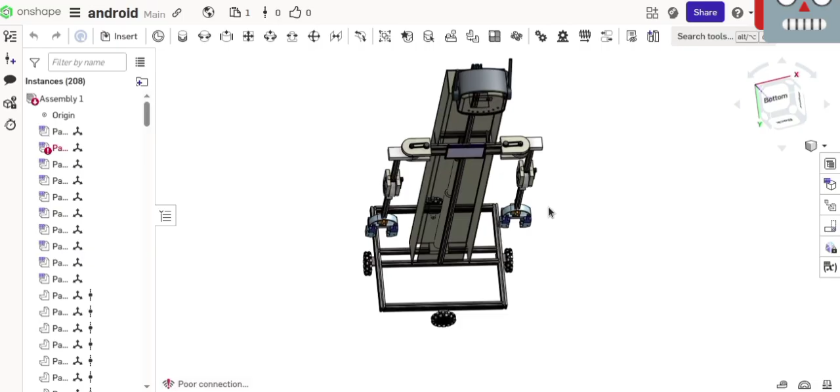Hi, in this video I will walk you through a robot that I have made for a startup-based company, for a robotics competition. The challenges explain their requirements, what they are actually looking for from us. They are looking for people who can make this kind of thing, even the chassis.

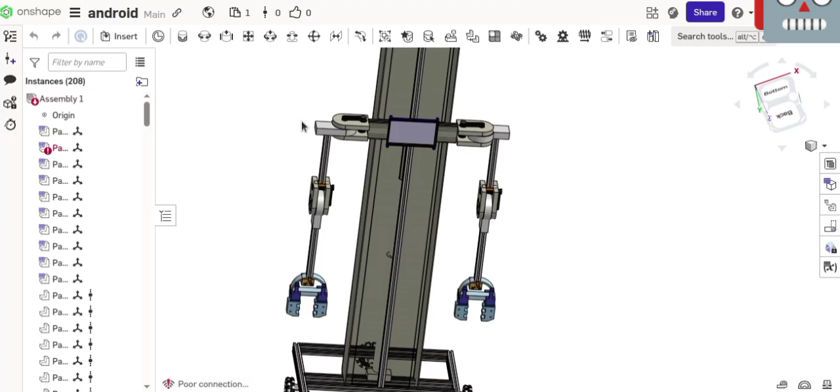This was my idea: a four-wheel and dual-arm based robot. In the center of this robot there is a vertical extrusion which gives support to the arm, to the shoulder. The shoulders can be increased or decreased using the linear actuator present on the back side of that aluminum extrusion. We will be seeing that.

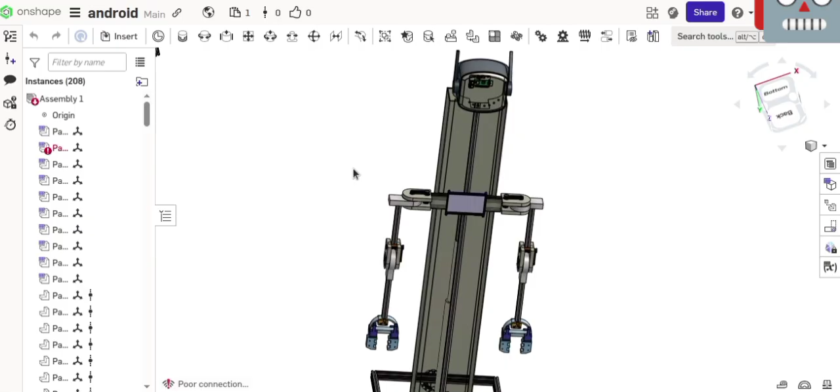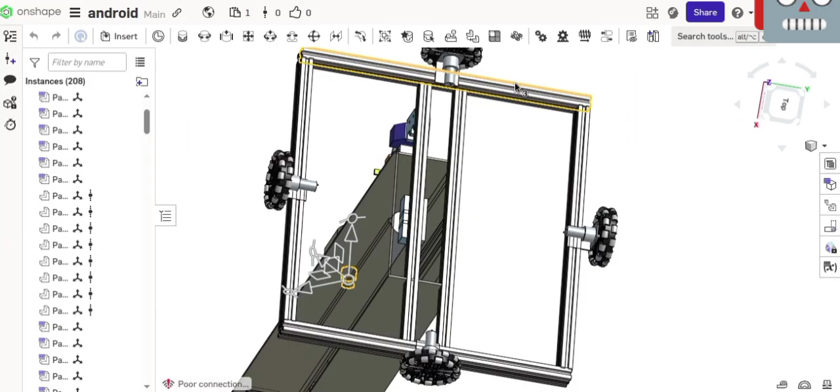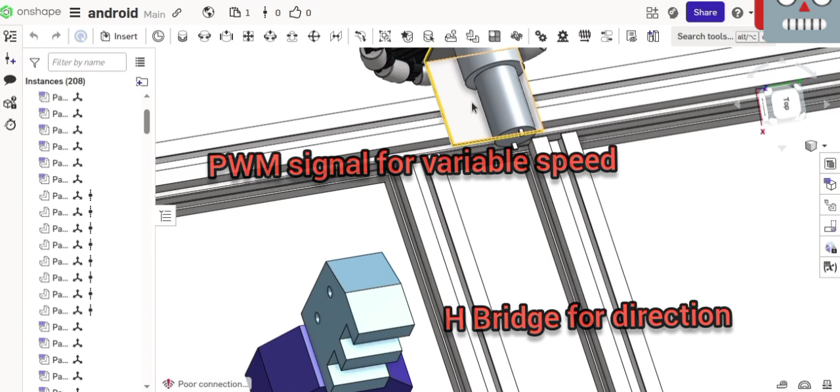On the back side of this robot, I am using four different motors here and four omnidirectional wheels. As a result, it is possible to get 360-degree rotation, and these are based on aluminum extrusions. Since I'm using 12 volt geared motors, I will be using power MOSFETs and H-bridges to give them variable speed as well as front and back logic.

Now back to the part studio. Here I will be explaining, back to our topic. So this is the aluminum extrusion. Let's double click it, then we can see.

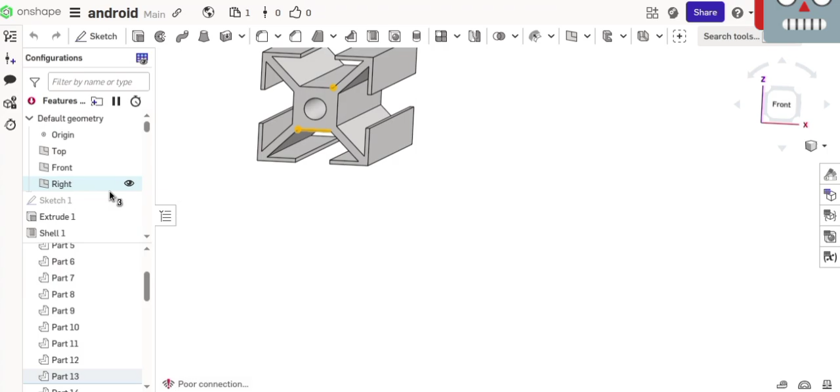So first I make a sketch, then removed some parts and made some adjustments, and later I created some parts here that look similar to aluminum extrusion. Those are the dimensions which I have taken from the internet for the extrusion.

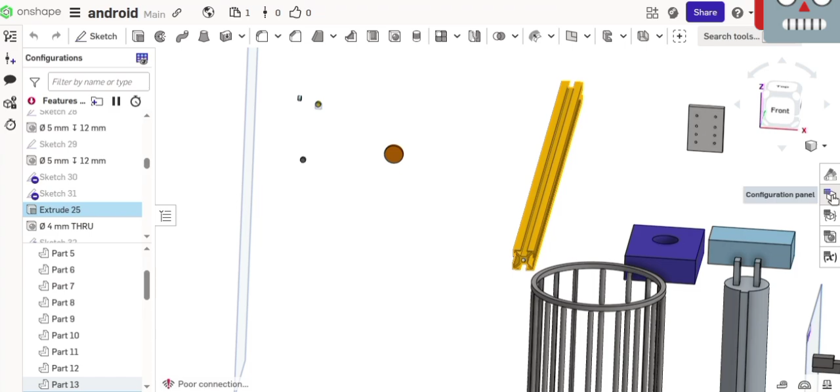Because we want so many different shapes of this aluminum extrusion, you can see I have given so many dimensions here, from 50 to 1500, and similarly for other parts. Let me show you what it is.

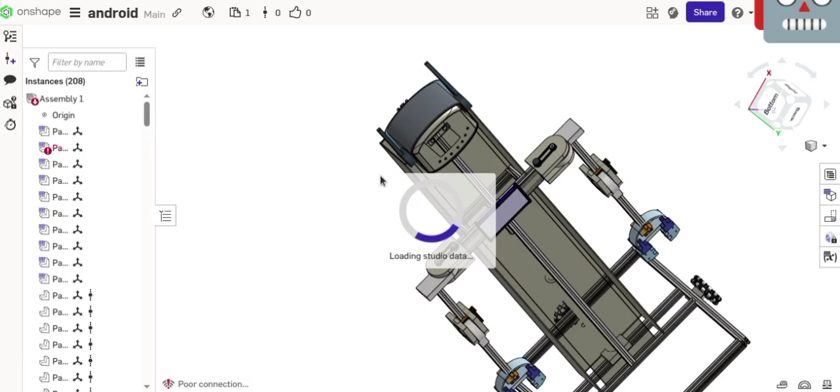In the assembly section, you can see I have used that aluminum extrusion here. This one is the biggest one, which is 1500, and then other parts as well. You can see some small parts of the aluminum extrusions are also used, for example over here.

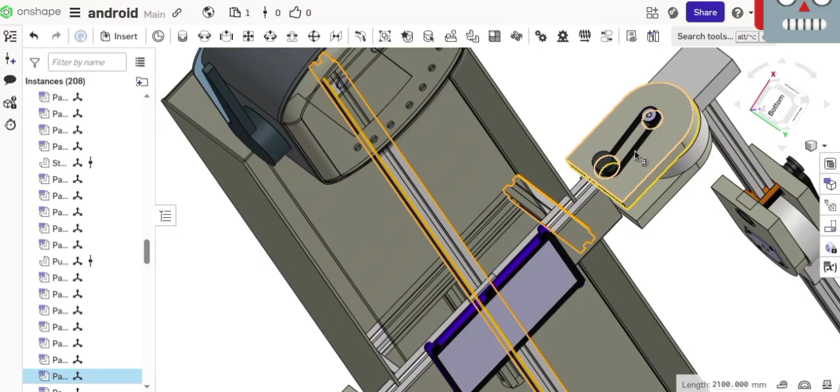And these are some pulley and belt mechanism, although it is not perfectly aligned now. Let me see if I have something here. So basically the idea is inside.

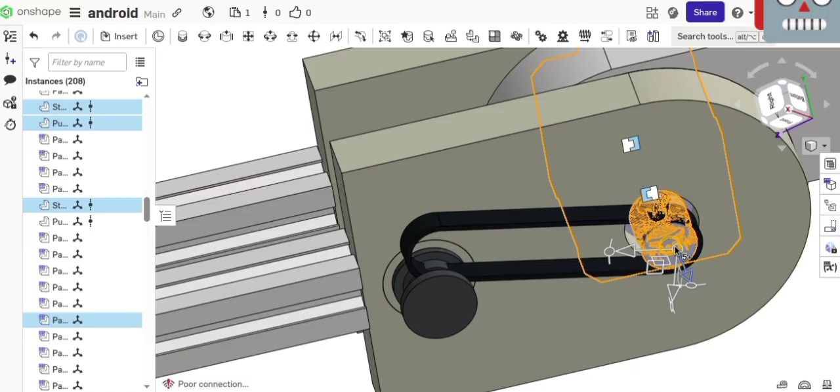Over here I have a motor which is a stepper motor. Inside this I have one stepper motor, and the stepper motor's axial axis -- when this rotates, this pulley also rotates, and as a result we get the capstan drive mechanism for the robot arm.

Let us see this one. I have a very short amount of time, so I have decided to use the capstan drive. For the one arm, I have used such capstan drive two times, and over here I have this.

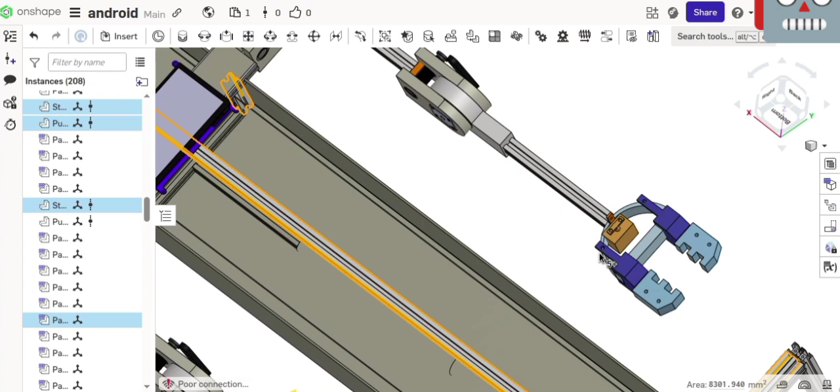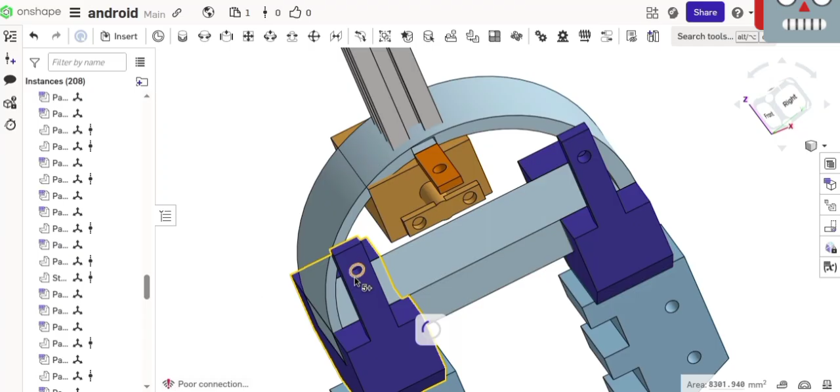You see, this is the hand, so this can take objects, this can hold objects. The idea is when this motor rotates -- this is a servo motor -- this is the axial part. When this rotates, one part is connected here, and from here to here I have another part connected. So when this rotates, they get closer to one another, and as a result it makes a grip. So this is the idea.

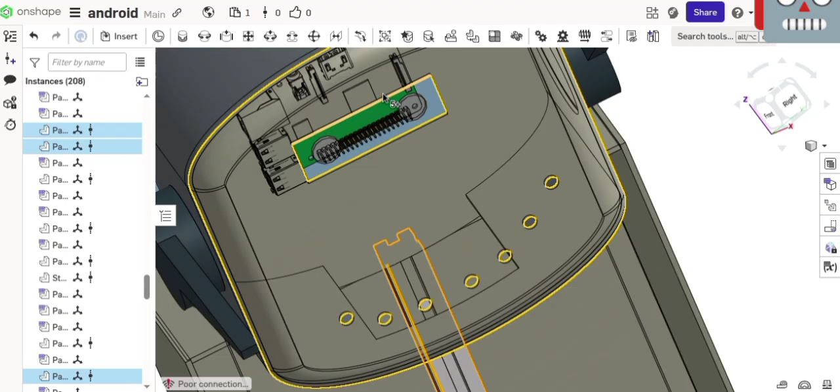Now over here I have one LCD display, 5-inch, and in the head section of this robot you can see I have one single board computer like a Raspberry Pi. So from here it is possible, or it is quite easy to connect.

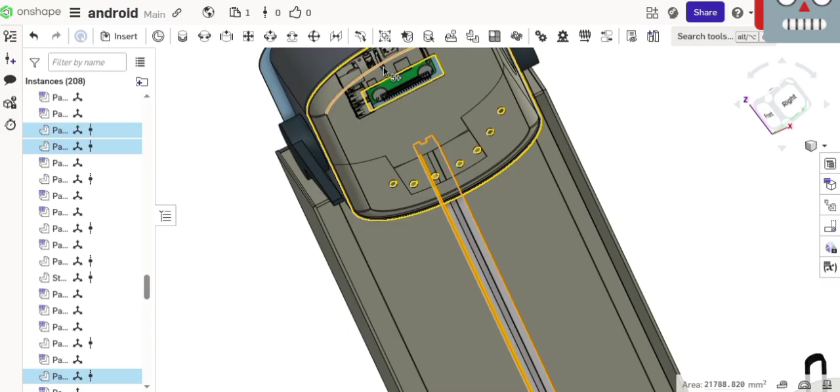Like here I have so many options. Take for instance, we can also connect that display using this CSI port. Let me see, CSI port for display. Let's see what is CSI port. You can see this, okay, that's camera serial interface.

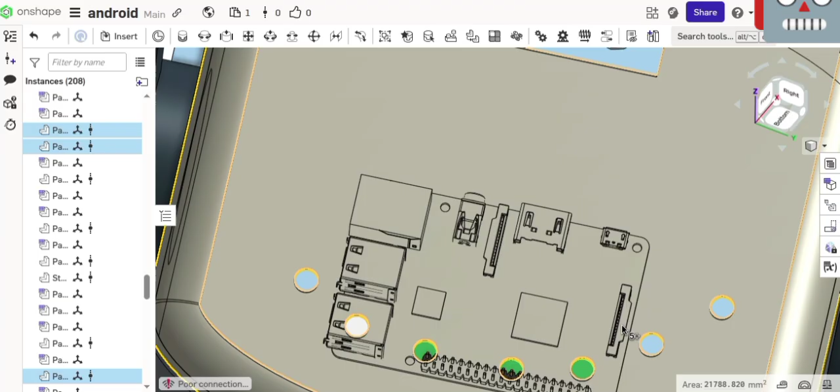Over here you can see we can put one camera here or here. I think it is also possible to connect two cameras here and use, like we can use, if this is CSI port, then what it is for display, or we can also use these two for the camera input and this HDMI port for the display.

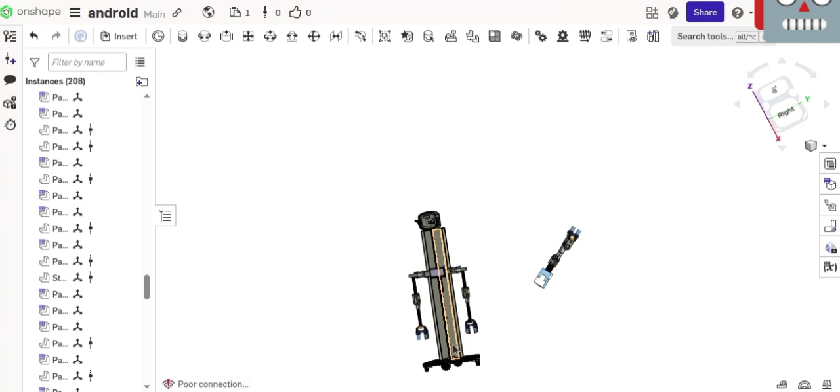And the main thing is, suppose it has to take some objects from the ground. So in the back side of this robot there is this thing, this, that is called...

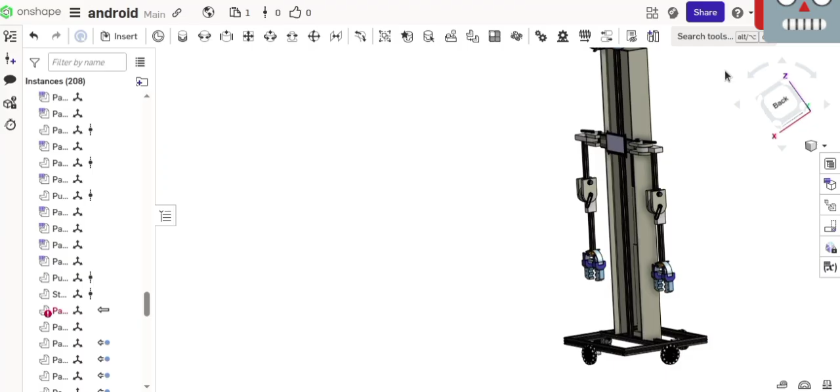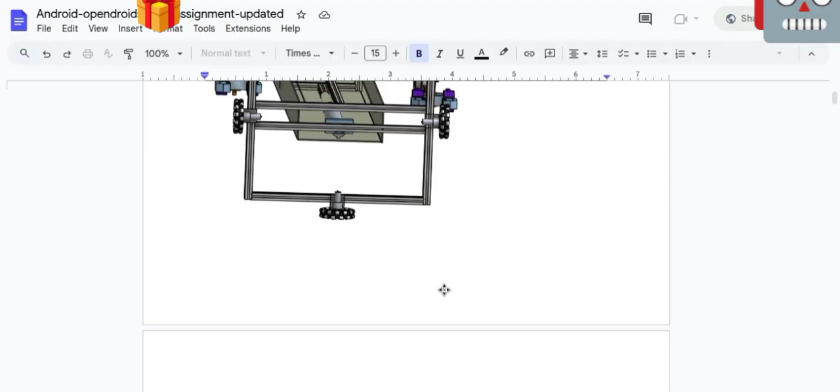So this was my report file, and you see this was the idea. Here I forgot the name, why I decided to open this thing.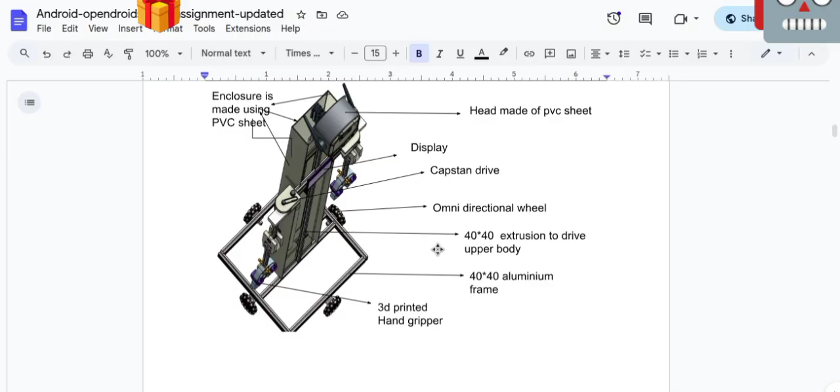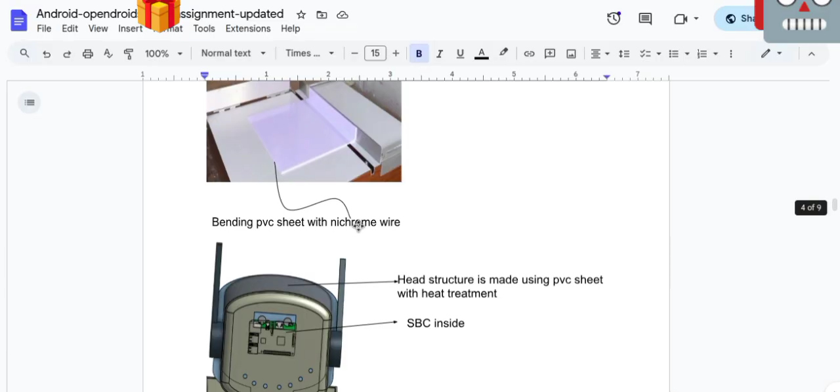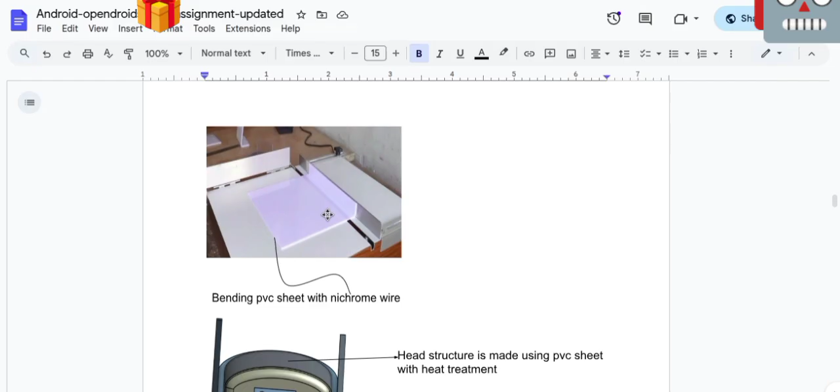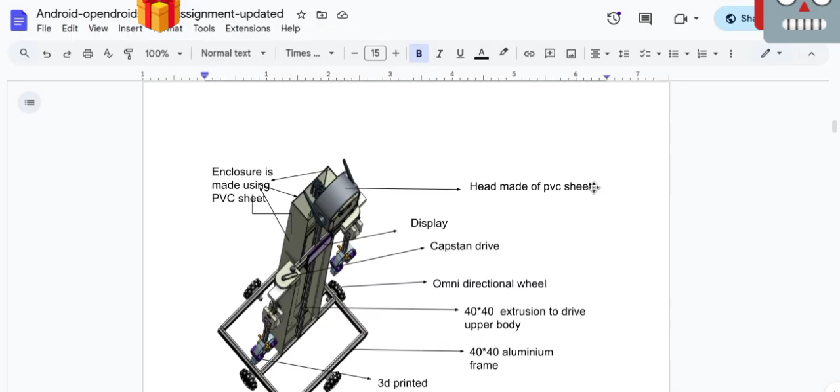You can see this, that's the capstan drive mechanism, and it is also possible, I know it is also possible to bend PVC sheet using nichrome wire treatment. Just heat the wire by passing some current and put the PVC sheet and bend. So we can use that PVC sheet to cover this robot. You can see we can hide the interior of this robot using that PVC sheet. Even we can use that PVC sheet for the head section. You can see head can be made using PVC sheet simply by bending using this method.

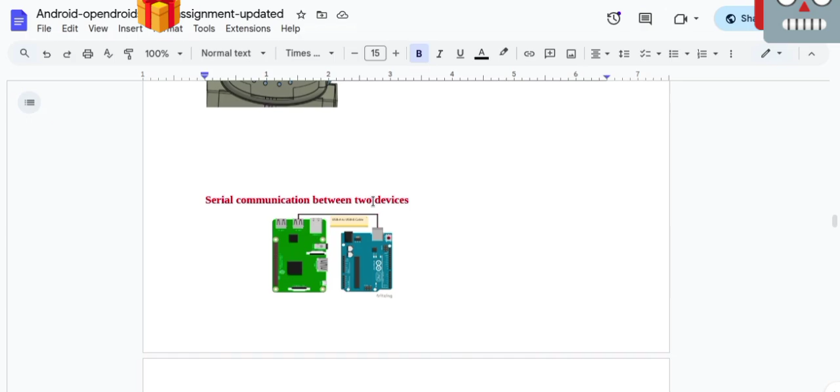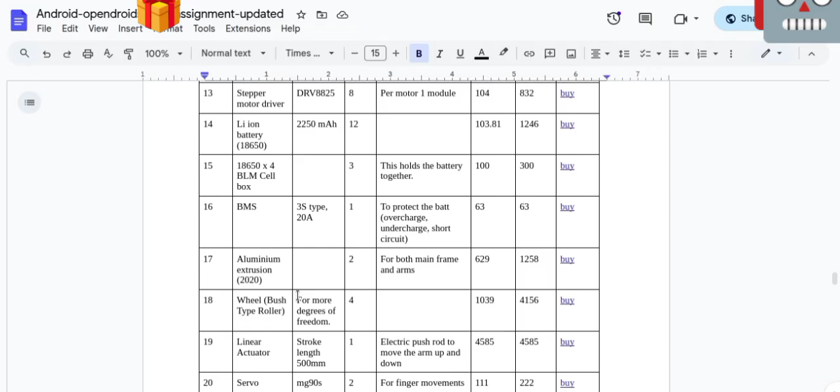And of course it is also possible to communicate between these two, from USB to USB communication, it is also possible. And here that part is called, yeah, linear actuator. Okay, I was talking about this thing.

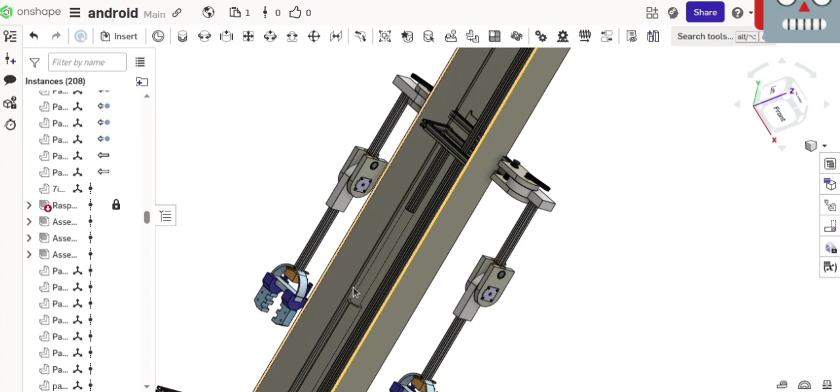You can see here I have some, yes, this one. So, shift, shift. Okay, so I was talking about this rod kind of thing. This is connected using some power source. This can expand and the height of this rod can be increased or decreased. As a result, the entire arm section can be pushed upward or moved backward or lowered.

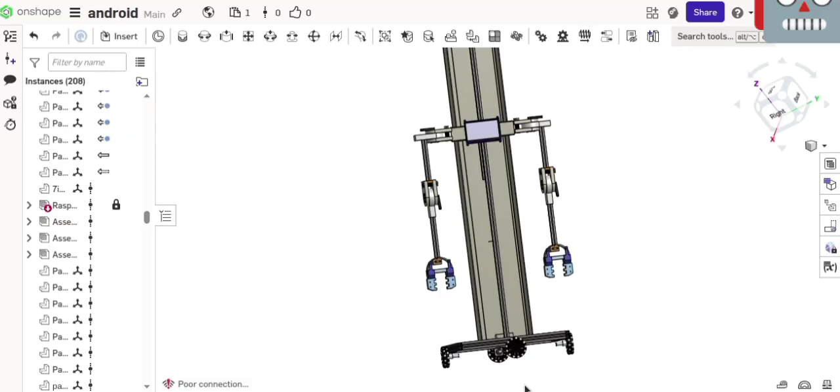This arm, it is possible to push this arm upside or downside. As a result, this thing can come here and it can take that object, and then again it can go back to its normal position or anywhere here, and this can rotate.

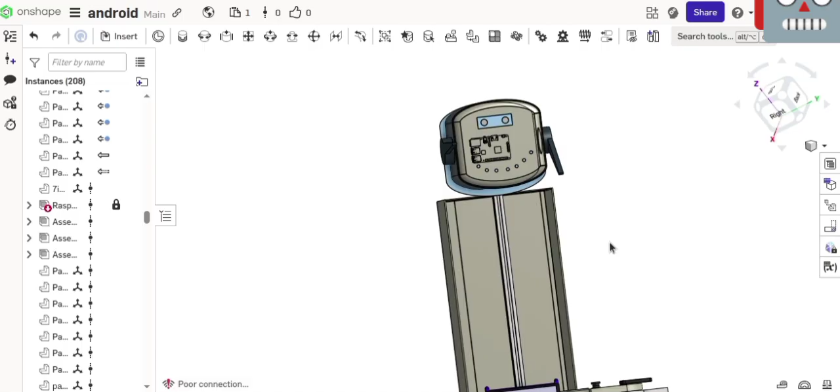It is also possible that this robot can talk simply by putting a speaker somewhere here, like, yes, the job is done, or maybe to give some feedback to the users, like when somebody calls it by its name, then this can respond back.

My idea was to use this for the laundry or as a waiter kind of thing, to take and distribute foods at the table.

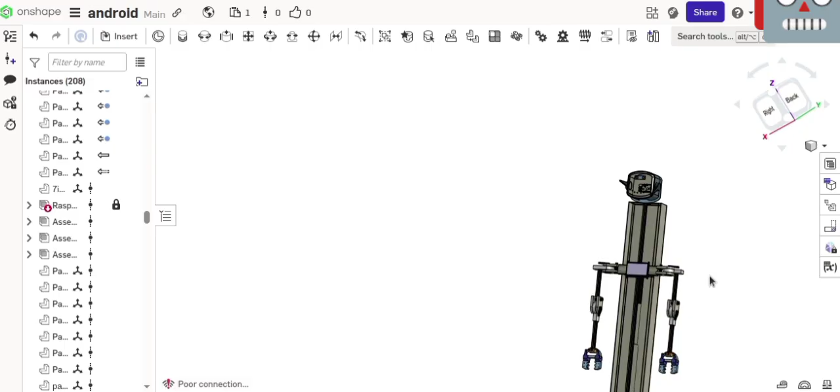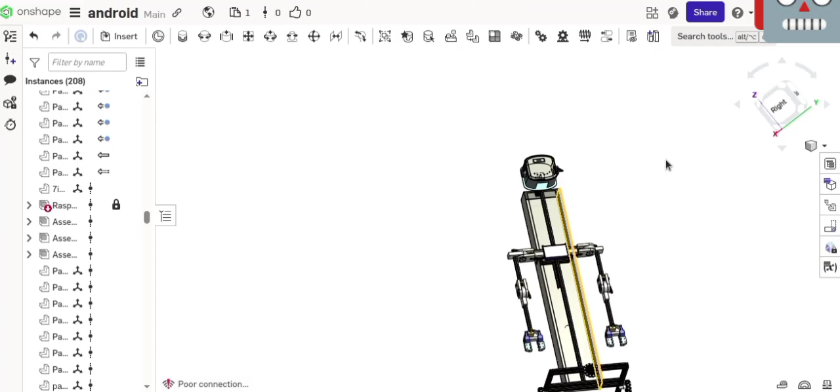But this was not approved. I don't know why. Maybe they found some better designs than this, and it was also a learning experience for me, because this tool OnShape, I never worked on anything in the 3D domain before, because my background is purely electronics. But again, I really enjoyed it, and along the way I learned how to use this OnShape tool to create a plastic enclosure. Maybe I can use that plastic enclosure in my projects, or maybe in products that I will be building very soon.